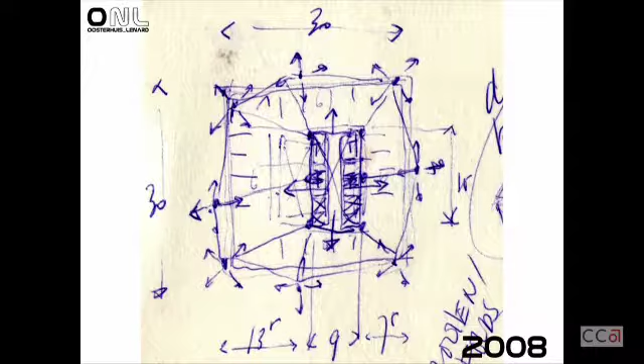The way I would like to approach it is to have one system where I can tweak all the points, all the vertexes—just like it's also designed for a tower, exactly similar, but with a completely different attitude. Then I write a program where I can tweak all these points. Probably because this came too close to this, but I'm not sure—I won't do that again. So I can tweak those points for all of these floors, and while tweaking, this is my target value.

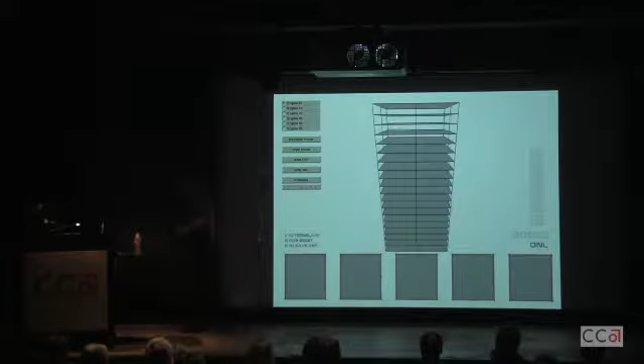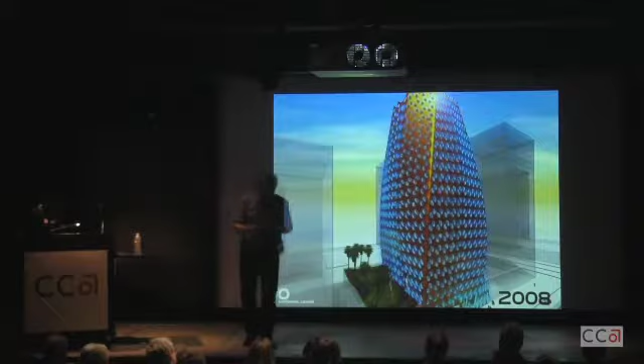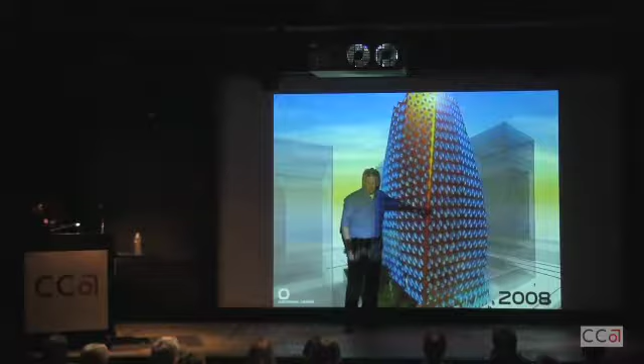The interesting thing here is that in the process, things change. For example, one week before we had to submit for the building permit, there was an extra elevator planned inside. So we had to pump up the whole volume again to reach the same GFA, because the elevator is not included in the GFA. We had to pump them and tweak all these curves again, and we did that whole work within one week. We redesigned the whole design because it was a parametric system, because it was consistent, and all the parts were related to each other—we could do that.

So this is an important quality or potential of parametric design: that you can have all building components related to each other in every stage of the project, from sketch.

It's actually a rough technique that does not allow these sketches to be directly translated into buildings. That's what we try to do, and it's very much in the way we work together—we want an intuitive approach, directly related to how things are made, with the precision of the new technology.

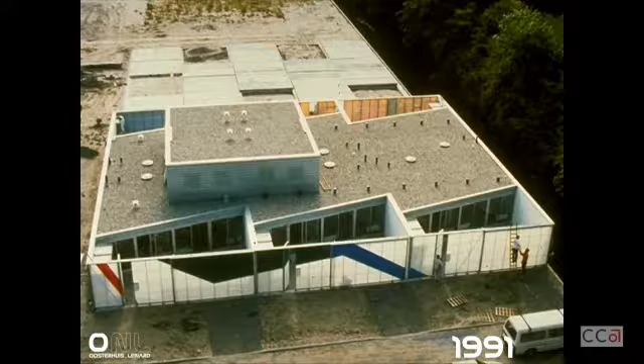And of course it does function—you could slide doors open and put your car in there. So it was a very pleasant way of living, actually, in this patio housing in the middle of the city.

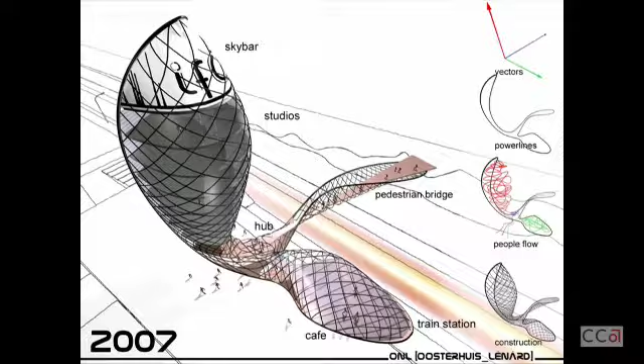So this is another example of those power lines, as we call them—these intuitive gestures. They can constitute a building, eventually. It's one gesture, and we already have in mind that it's becoming a tower, and that's becoming a bridge, and that's becoming a canopy-like structure for a train station and a restaurant. We already have that in mind, and we make the sketches, and then these sketches become exactly the basis, very precise, for the later building.

Another example of an intuitive sketch directly translated into a building. And actually the interesting thing is you can just do this. There's nothing which stands in the way—you can just do it.

Of course, we have to find a system for how to build this, how to build components and how to connect components to each other. Here's another system embedded in it—you have to think of that component and the others, how do they connect to each other.

For today's architecture, I think it's not so much the isolated things themselves, but how they connect to each other. I think that is some of the basic things we are worried about these days.

The essence of how we operate is very much like procedural work, procedural painting. So generating sketches is already a procedural act. The way Ilona did it, for example, was making hundreds of sketches in 1 or 2 seconds, very fast. So what Jackson Pollock was doing is also very procedural—it's a method, it's very methodology. And that is very interesting because it is so close to scripting.

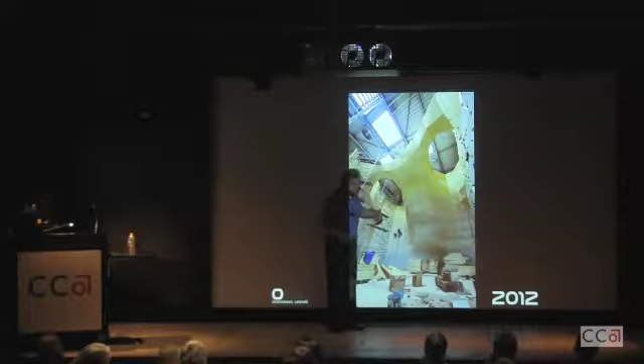And it's high resolution, so that's the other thing. So this is, for example, a sort of in-between step we are taking with our office. It's a climbing wall system. It's very systemic. It's open to information from power lines from our side. It's open for interventions by climbers themselves. It's an open design system. It has the building components. It has a higher resolution than the living unit. And you can build anything with that. So that's actually the translation into practice of that attitude.

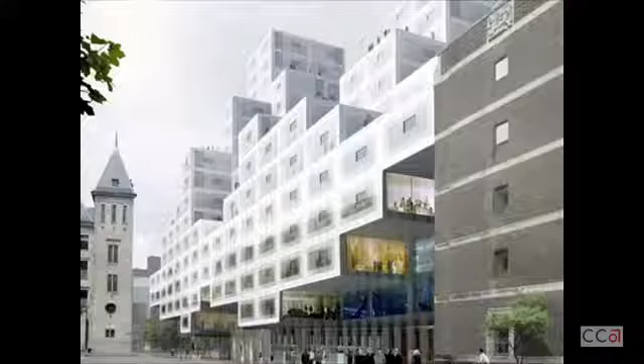So then we talk about resolution. This is an OMA project. It's again that low resolution attitude, which is very similar to what happened in the 60s and what happened in Montreal also in the 60s. As opposed, just to clarify positions, different positions you can take in architecture - you can take either that position or you can take another position.

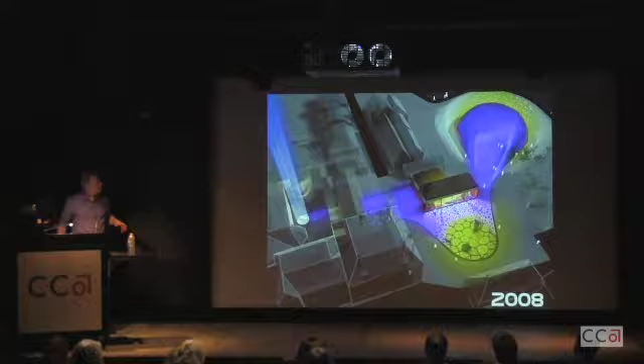This is one of our designs where we have a very high resolution actually in a roof. It's an underground project, and there it becomes a landscaping exhibition hall. And it's all based on that building component that can also become larger, and then it can shrink and expand. It's a complete parametric system, and it's completely moldable. That is higher resolution, as high as we think now it's feasible. You can also go higher in resolution, in fashion, for example, and you see a lot of developments actually in architecture that go even higher and higher in resolution.

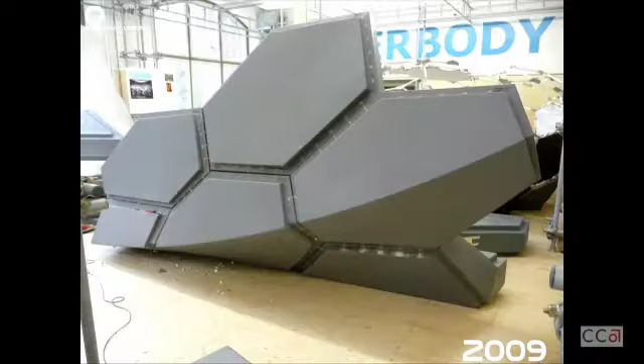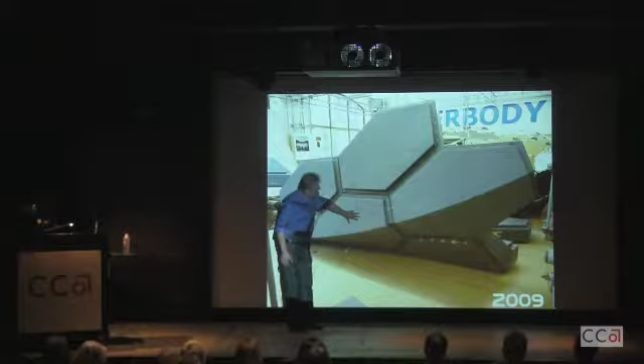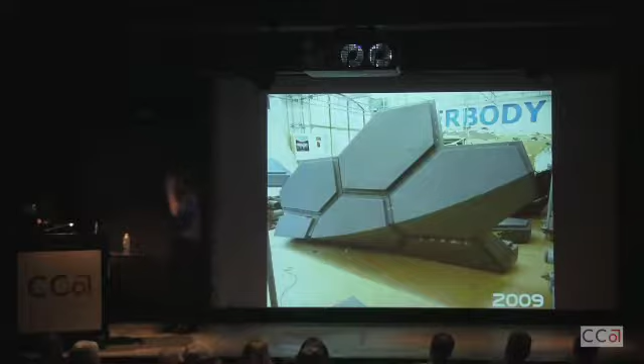But it's higher resolution. So this is a kind of resolution we are working with, with our Hyperbody group at TU Delft. This is a building block. It's fully parametric. It can take any shape, but it's always related to its neighbor. It's almost like, and that's the comparison I often make, it's like this is a bird, and that's another bird, and that's another bird, and together they work in a flock. And they always are measuring the neighbor. This reference point is always questioning that reference point, which is the point of gravity. Where are you? What is your distance?

And that is the kind of thinking we are completely immersed in these days. And I think that is a very good way forward for a next generation building to think like that. We have to change the very building blocks of architecture. That's basically the message. So don't think bricks, don't think prefabricated housing units, but think of building blocks that are fully parametric, fully controllable, both by your top-down design acts, radical or not, or by systemic emergence from the system itself.

I also use an approach where you have a series of points that relate to one another. But when the purpose is just to manifest a form that you sketched out, that's where I start to lose you. I can see a valuable purpose like cutting down on material waste or creating a unique lighting situation for a unique program. But when you stop looking at function and just make a parametric system to realize an intuitive sketch, that's where I start to lose you.

Well, there's more to it. So stay with me, you will find out. There's more to it.

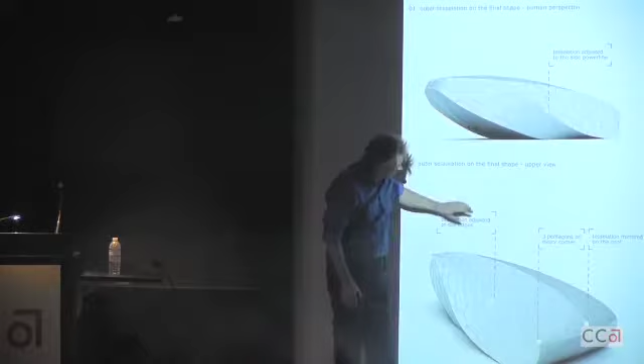The point I want to make is that we have these swarming elements, but some elements may be a window, or a ventilation unit. Some, not indicated here but you have to imagine it, can be a heat or cooling unit. So we can assign functions to each of those components, and all those functions together form a climate, a space, a building that functions according to a pre-requested program.

But whatever happens, the relations must always be kept intact. Don't lose the connection. That's the connectivity point I want to make. It's always about connectivity, both in its meaning, in its construction, and in its functioning, its operational life.

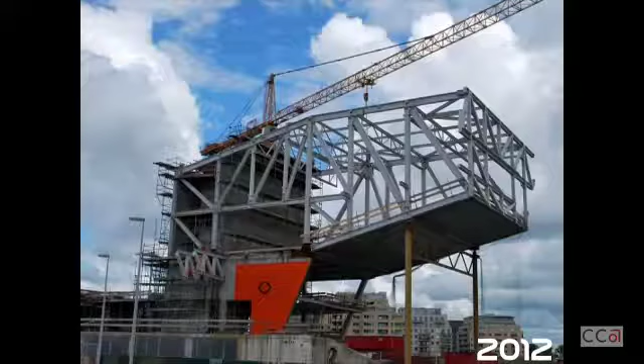If you look at this, it's a great building, absolutely great space in here. But if you then look at the structure, it looks as if I'm criticizing everyone. That's not the point. It's that I'm pointing out that you can have a different attitude, you can choose your attitude, what you want to do. If you see this structure, it's a mess.

I simply have to say, it's simply a mess. It can be anything. You see all sorts of hybrids, even in the steel itself, and then strange mixtures with the concrete. And somehow this happens all the time.

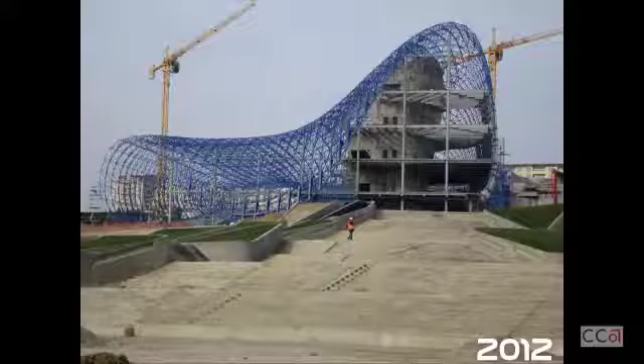It happens to Zaha Hadid. It happens all the time. You see this fashion around it, and you see this very traditional structure inside. And even, which is weird, this structure, which is absolutely able to bear its own load, is supported by these. It's not right. I'm absolutely sure she doesn't really want this, but this happens if you don't integrate the way you structure and construct it into your design process, if you don't relate it in a way that it cannot be taken apart.

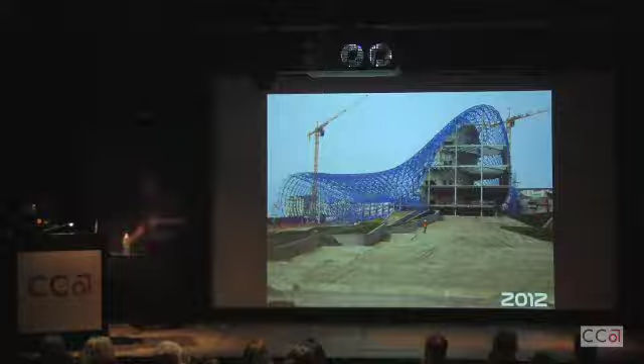Well, it's clear that it's like a drapery, like fashion, and it's very difficult if you start like this—that's another way it ends up for the person in the end. If you have this intuitive design approach, which Zaha Hadid obviously also has, but don't connect it to your design system, how it's built up, Patrick's part so to say, if it's too loosely connected, you lose that connection between the skin and the structure that supports it.

Okay, let's see how we try to do it. So all we do is try to do what we think is right. And that's also typical Dutch, by the way. That's our... but okay, I cannot change that. So, it was orange too, but it tastes like lemon in this case.

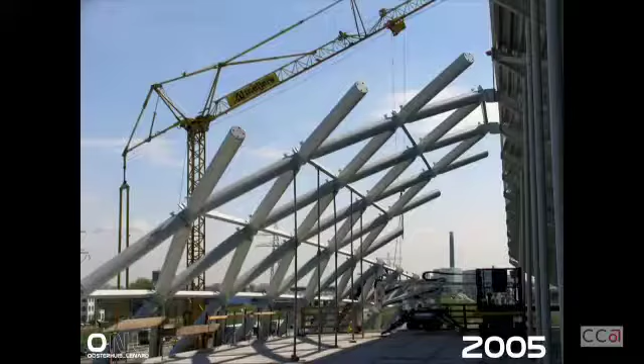This is the cockpit structure. This structure is completely in sync with the skin. It's developed together, and if something had to change in the skin, some of the dimensions, for example glass dimensions, you have to cut it in a certain way, and you cannot extend certain sizes—you have to change the structure as well. So everything is related to each other.

And it's a building kit. It's IKEA, basically it's IKEA. You have some of these components, they're all different, so in that sense it's not IKEA at all. It's parametric IKEA. So you have all these components, and you bolt them together, and surprise, surprise, you get your building. It's that simple.

You can do it with these one-person offices, they can do it, because it's that simple. If you build this relation properly, then you can bypass contractors. This building was not built by a contractor, it was built by a steel manufacturer. You can have a direct link between you and your design system and the one who makes it.

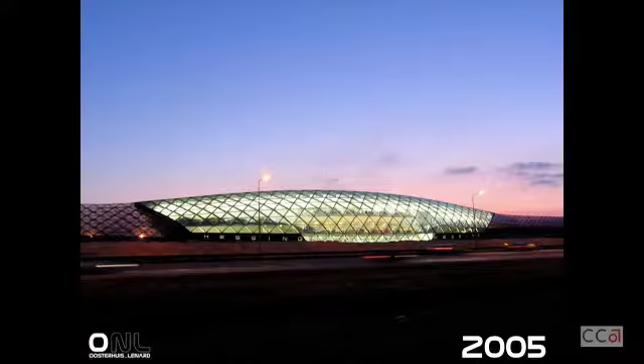There's a lot to say about this, but it's also used for movies. It's a very nice space inside. It is a showroom for expensive cars, like Rolls-Royce and Bentleys, Lamborghinis, but now it's taken over by another guy, and he sells Lexus—I'm not sure that's the proper one.

Okay, let's have a look at another aspect now. We have been talking about these building components, the relevance of that, so I have more about that. But first of all, and that was the first chapter in the book, tag that body.

So these are identities, all these points, it's a universe of the internet. All these points are tagged because your computer has an IP address, has a unique number. So what is now the case, is that all of these components your building is constituted of, they need this unique number throughout the whole process.

Chapters of a book have this unique number and unique relations to others. This is maybe more interesting, and it refers to that Hyperbody project I showed you of this building component.

So think of all these players. You have these, they are similar, but then you have the other type, the bigger ones. And they all have their functions, but together they form a relationship. Together they form interacting swarms of different components. That's exactly what they do. And then you have this type, and then you have the people that walk.

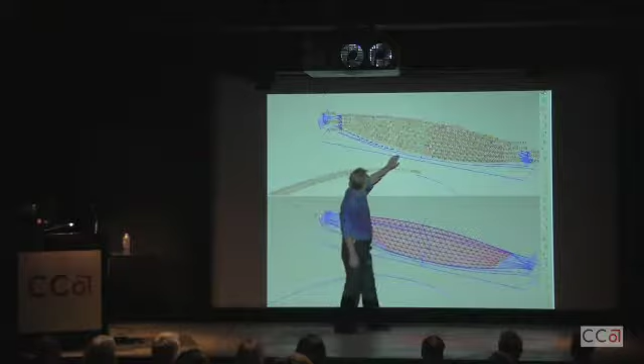We have all these points actually driven by a mother curve, a law curve, so to say. So there is some sort of law and order here, but it's radical, it's irrational, it's driven by that. So we have all these numbers, all these points, related in this network. And, oh, I don't have the next image here. Okay, I have to change the story then.

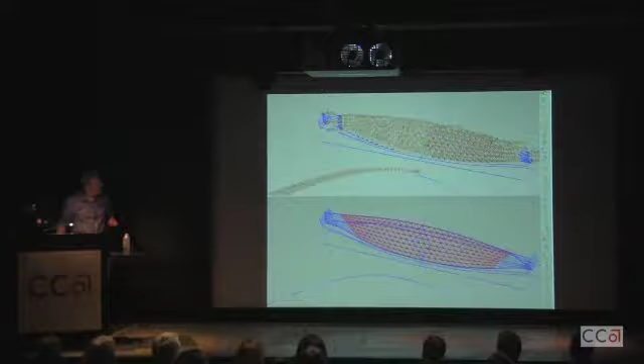Into this project... yeah, I'm so tired of these linear presentations because I want to jump, and I cannot jump in this PowerPoint presentation.

Okay, this is all the data you need to build it, driven by what I already said. You're driven by the angles from the climbers and the curves from the designers. But this is about the scripting part.

I wanted to mention, I think the difference between the chaos and the order: Bombay's population is half of the state of California. So two Bombays is the entire state of California. Would it work if we use the logic of our cities versus that chaos theory? Yes, the answer is yes.

You asked for it. Well, basically, what I think we have to learn is to deal with masses of data. We have to find a way. There are many ways. You have, for example, the other Dutch guy, Winy Maas, Datascapes, who works with massive amounts of data. But the other thing is, what does this piece of data represent? And then I want to go in a higher resolution. Well, the essence is we have to learn to work with massive amounts of data.

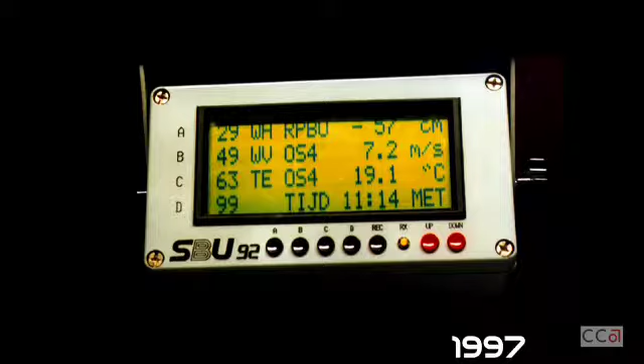Well, more data coming in from sensors, informing the light environment in the Water Pavilion, always changing according to that emotive vector formula, which is, again, completely irrational.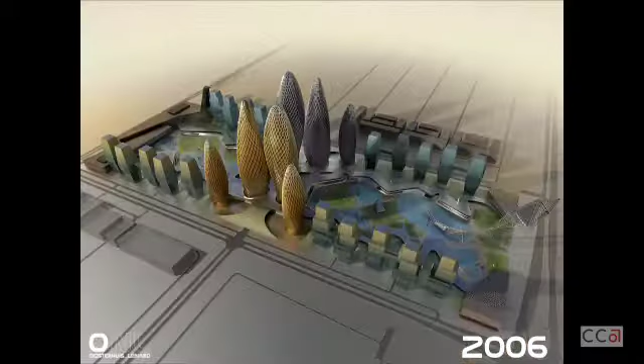Scripting, like a sort of game for urban design, where we can play with all sorts of parameters connected to those objects, and objects are connected to other objects. There are attractors that are actually aligning objects, there are repellers, etc. So everything is related in a parametric system, and in the end you can have a direct translation into architecture from that parametric system.

So now we come to that component level, which I keep emphasizing. This is an example - and that's another name I have difficulty remembering... that's her, yeah, that's her. I think these are quite repetitive, these components, but what I like is the airiness and the lightness of it, and there's a relation with the structure, by the way. That structure is not exactly correct in its execution, but I think it's a big step forward.

Another way of thinking of components is, of course, this - what's the exact name of it - quadcopter. The quadcopter actually picking up the stones and placing them one by one. Well, you all know this example.

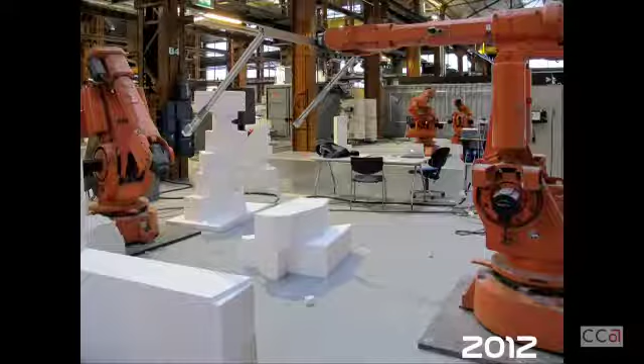So also in the assembly phase, this gives the promise that it's important to have an identity of each component, and an identity of the relation with the neighbor, the exact position of it. But of course, I would never choose bricks to work with. I would make my components as unique components and then have the quadcopter placing these components.

So what we do here in Hyperbody, my research group, we have 4 giant robots. We have this as basic material, and we use something like this, which is a hot wire that can actually move in space and describe all sorts of complex forms, but still linear because it's a wire. We also have that with a diamond cutter for harder materials. And then we can make things like this - a building component which in itself is complex, and which combines with other components to form the structure.

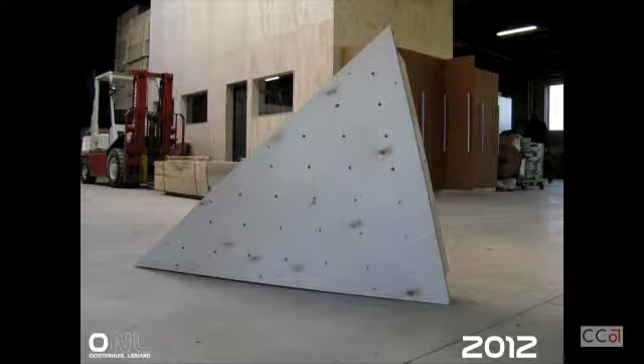Well, back then, to a simpler component - explaining how everything and all the connectivity to other components is actually already embedded in one component.

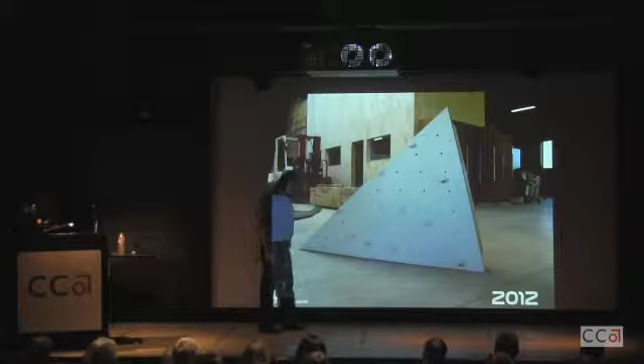Okay, so all the shapes are different on that climbing wall. It has one central point from where all these other points, necessary for applying these climbing grips, are aligned with it. And if the triangle is different, the pattern is also different. Then we go to the other side, the back side - everything is 3D milled.

Oh, the side of this - you have to realize that the side of this triangle has a twist, because the shape is doubly curved. Everyone who has worked with doubly curved surfaces knows this: if you have a weight normal on the surface here, and the next point you have it here, there's always a twist between those two weight normals.

So how do you do that if you want to have a smooth surface? Then you need to go from here to here with the milling machine, following that twist. This doesn't need to do that, but it needs to be adjusted in its base, such that it can be connected by bolts to the next one. So all the connectivity is in a parametric way, in structure and skin, connected.

No, I don't have that image. So behind the scenes you have all these connectors. You connect here, and the interesting thing is that we don't have structure in the node. We have it here, and then it transfers the forces through the skin to the next connector, etc. So the whole thing is very much skin and structure working structurally together.

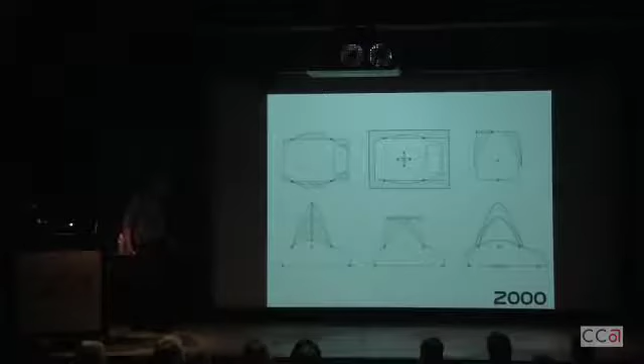So that's where we come closer to making products, housing products, house as a product, where you can actually tweak all the vertexes yourself. This is a project that has not been built yet, where users can tweak all the curves to adjust their own shape. That's done through a website. We already built that in 2000. So you can tweak all the curves — you see the feedback here, the curves, roof, other curves, sizes, pump it up.

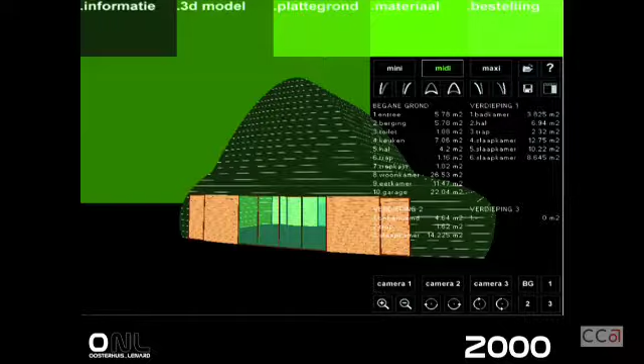And the interesting thing is it's still our design, still our signature, but it's also open to users. That's also their signature — so we become co-designers. More examples of that.

Let's quickly go to this. This is the basis for that polynuclear landscape design I showed you before. That's the plot, and the plot has that potential of bottom-up grow emergence. Well, it's very obvious for you as Americans that the plot has that potential. I think it's brilliant. Grid cities are brilliant.

So that landscape has the potential to grow from there, but maybe there's one step more we could do, and that is in another way play with an attractor game we wrote in 1997: play with parameters, the sizes of what you build in this landscape, and the cubic meters of water you want to build. So register everything exactly, play with the number of trees, and make these public spaces, these combinations, but all based on an exact calculation of how much you have.

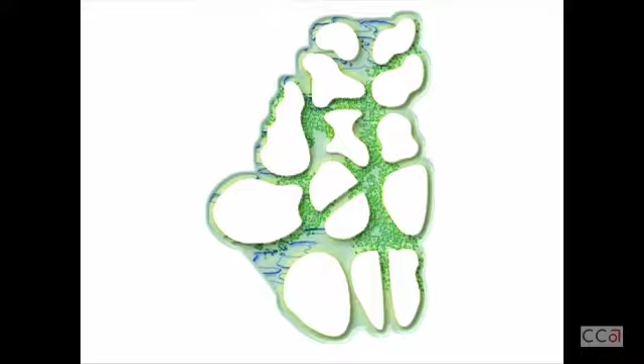So this approach could be combined with gridded cities. For these areas, playing that design game, you know exactly how big these domains for living are. And here it was interesting to have ecological corridors in the housing areas, with this as an end result of an urban design for 1,500 houses.

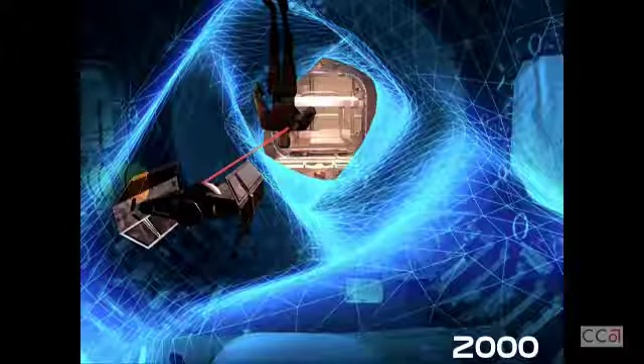The other aspect is when you identify all these individual components, all these reference points and the connectors between them, you can go lower and lower, or higher and higher in resolution. You can also actuate them. If you can identify them, you can also tell this point to move if the connector between this point and the other point is an actuator and not a static one.

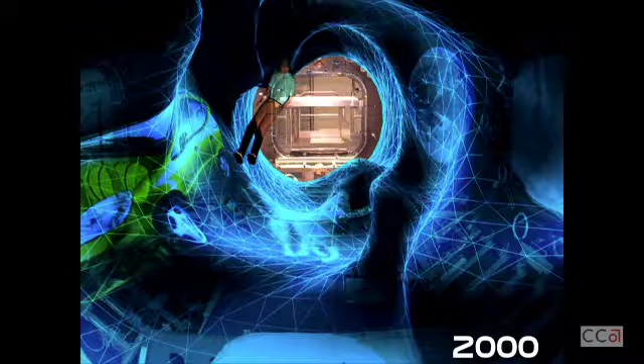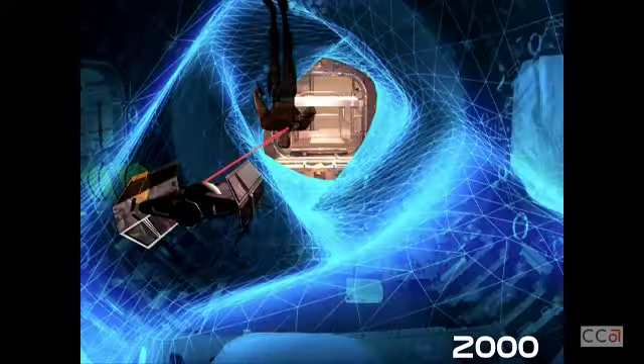So that was the basis for this project. It was the design for the interior of a space station, to have one skin that is fully programmable, and you can program this space to be different things: a working environment, for example, where you have sort of a table, or this other environment for playfulness. So you can have these different modes, basically.

You can have these different environments that actually accommodate different functions. So this is another way of telling that it makes sense to identify and think at the component level and have the emergent modalities from there. It does make sense. And also this environment is completely informed by what you want to do, so it can be informed by functions, by activities.

Project we did with Philips, it's called iLight, intelligent light. These are tiles that are intelligent. They are connected to the neighbor by magnets, so you can take them apart and place this tile elsewhere. It has a circuit board inside with small intelligence, and it looks at its neighbor and asks what is your state, your color state in this case, and then negotiates with the neighbor to become similar, to adapt to the other state. So you can see things happening here. It works. This tile exists. It was an experimental phase, but it's not on the market.

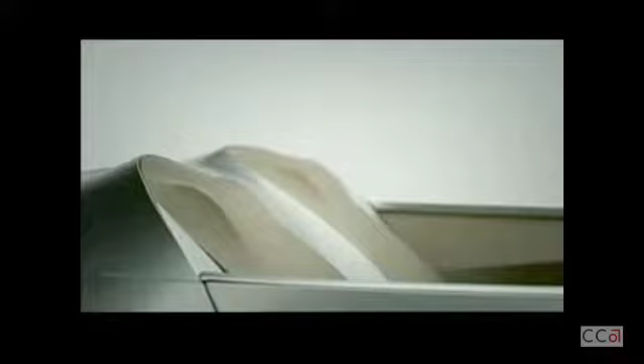Just have a look what is happening here. The feature lines, the other irrationality in car design, aren't exactly for streamline, but for building the character of a car. These feature lines can move, so as the owner of the car, you can tweak these lines yourself, you can customize the feature lines of your car. I think it's a great idea. Aesthetically, this prototype has been the basis for the whole BMW 5 and later 3 series.

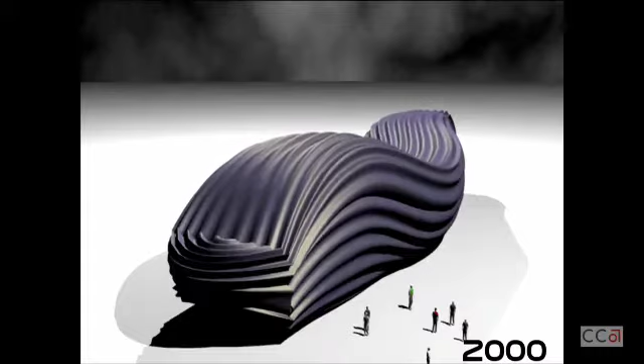What we fancied in almost the same period is, suppose you have this building, it's big, you can see how big it is. It has this three-dimensional skin connected to its structure, composed of actuators, big electronic pistons. You need those pistons to know exactly where they are, so you can give feedback to the system. If you compose your structure of these pistons, it can expand and shrink, and you can adjust your building to different functions. This is another idea that is actually quite valid. It sounds a bit far-fetched at first, but you will see how much this has crept into the minds of many younger artists and designers - this adaptivity of structures that you can adjust to different circumstances.

Maybe it doesn't look like this, maybe it's much more distributed, like components, like this project we did with Festo - certain components of buildings that behave differently and can respond to the people using the space, or passengers using the space. The walls, this dynamic wall, could then respond to you as a passenger. You pass by here, in the base there are sensors placed. These sensors sense someone approaching, and then they respond to that. The way they respond, of course, is completely up to the designer, because programming, writing lines of code, is designing - there's no difference.

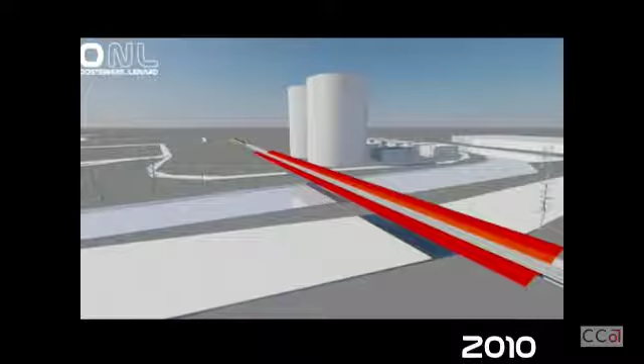Actually, adaptivity was our main issue. We should not resist and we should not fight, but actually adapt and include. Inclusion was the main issue — we should include different ways of lifestyle instead of resisting and fighting. And of course there was always one moment where you think back, and this volume could actually become the two phantom legs of the World Trade Center. Sorry to be a little bit shocking here, but the basis of it is to adapt to changing circumstances.

An acoustic barrier that adapts to the train passing by.

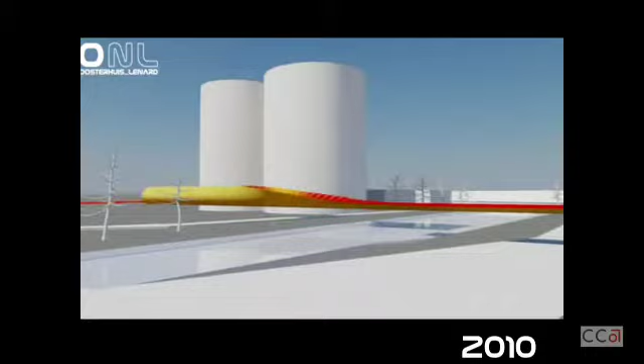The motto for this project is very clear. Now you see it in the relaxed situation — you don't need an acoustic barrier if there's no noise. That's basically the message. So why should we build all those ugly fences around the highways to block the sound if there's not always sound? Well, for a highway maybe it's almost continuous, but for the train it's absolutely not.

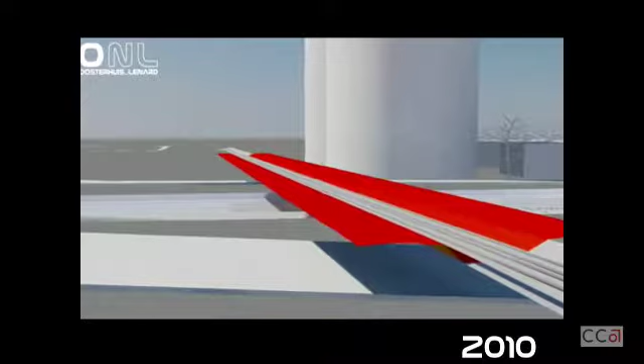So once in a while there's a train, and then this acoustic barrier wraps the train to block the sound and then relaxes again, and can have a life of its own as an art project. It can relax and have some movements, even if there's no reason.

Can I ask about the functionality of the acoustic barrier? Because my understanding is the requirement for sound buffering is mass. Yes. And the image that you have is fluid, and it seems thin.

Do you mean this image that I just showed? That has mass as well. You don't need much, by the way, as mass. There may be a new material that we don't even have yet that will provide acoustic insulation that doesn't need to be stiff and heavy and weighty. No, it doesn't have to be.

The requirement for our acoustic barrier was you need 10 kilos per square meter. Well, that's this much sand, for example, in a flexible bag — that would do it already, so it's not that much. I didn't invent the rules, but that's the rules that were given to us, and that would suit our situation in Holland.

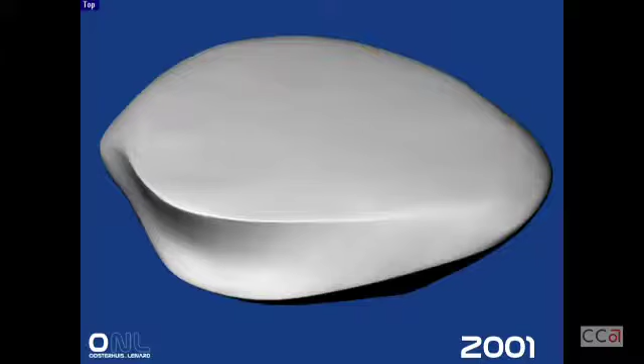A smaller one, the Web of North Holland. Structure, the play of light on masses - what was exactly the quote of Corbusier? Masses, play of light on masses. Also from the inside, like hot lava, it's coming from the inside to the outside. This is the design, which is the power line, the feature line on the volume, very much comparable to feature lines from cars.

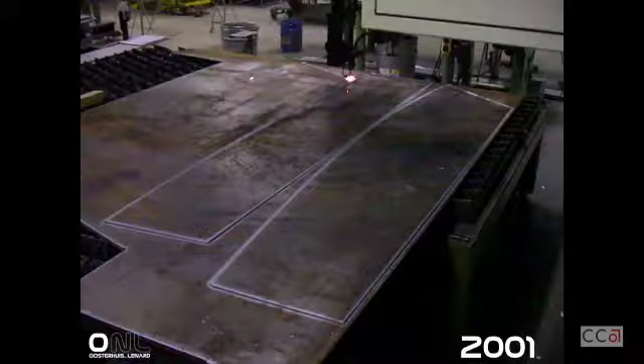Translated into structure, CNC produced, just to give you a very quick overview of how things are done. It's not that advanced - this is a machine that already existed 15 years before we even discovered that it existed. So these big periods of time really have to pass before we get to know things.

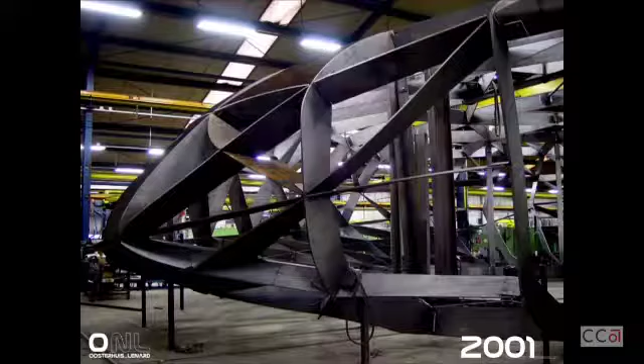Then each component is unique, and because it's double curved, many components are twisted. Let me see, where can I show that? Strange, well, okay, you can see it in this one, for example. But actually most of them are twisted - oh, not these ones, these are not twisted - to accommodate the curvature.

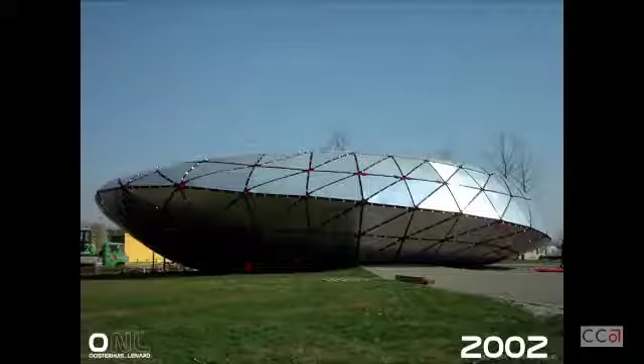Architecture - no, sorry, art, architecture. Yeah, because now it has a function, it has a door, so there must be something in it, so it must be functional, must be architecture. Well, that's the whole difference between art and architecture.

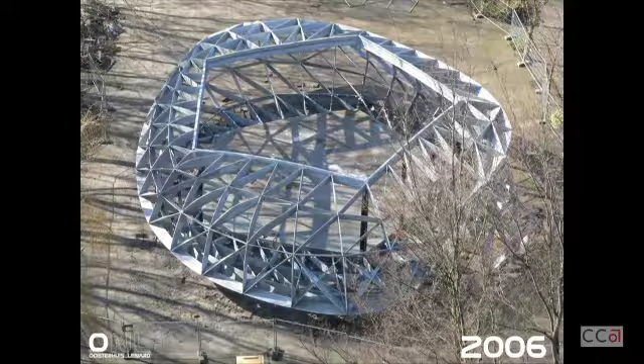Functional use, second use, the structure alone, new detail, in front of the faculty - in front of the burned faculty. This was a tragic moment in 2008. And now that building is completely gone and we are in a renovated old building. Maybe some of you know that, and actually it's a perfect place to work. This was not so good.

Yes, I go now to the - let me see, yeah, I think really these sort of facts is good to see. Just go quickly through it.

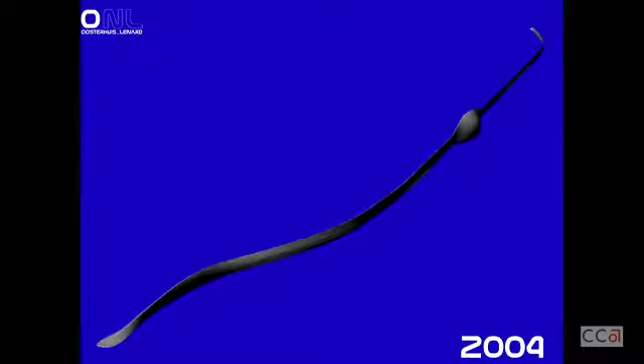This is the acoustic barrier in the cockpit, point cloud, scripting - not drawing but generating. Not drawing, generating the 3D model, generating the exact panels to cut for the glass, generating the exact holes for where the bolts have to come.

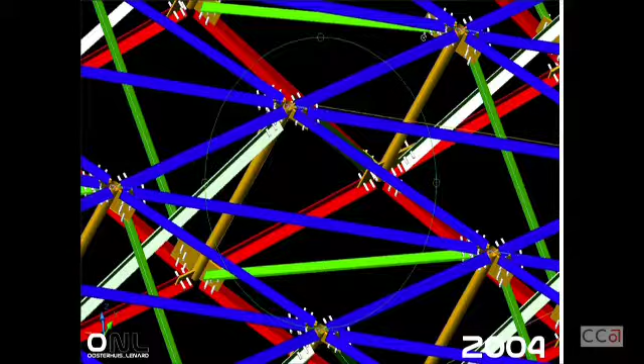This is actually a visualization of the structural program of the steel manufacturer. Making it, it's as simple as this - it's just a normal workshop, but it reads data.

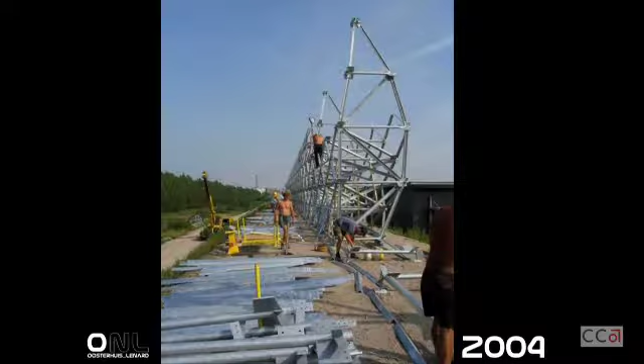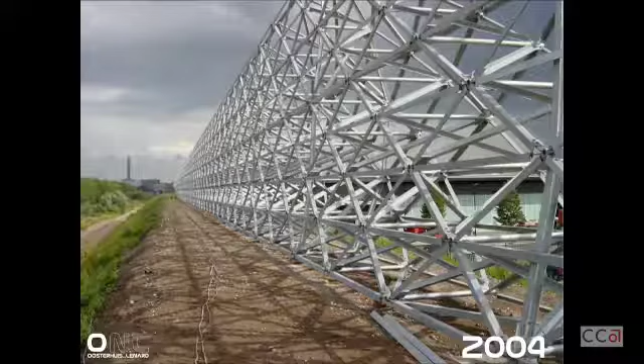Making a prototype, always necessary. Identify all the components - each component has a unique number. Make prefabricated packages of components, bring them to the building site and bolt them together by heavily underpaid workers, I have to say. That is mostly the case, because they don't need to know anything, they only need to know a number, and then putting them all together, and then the dynamic of the shape is formed, and then it forms the shape.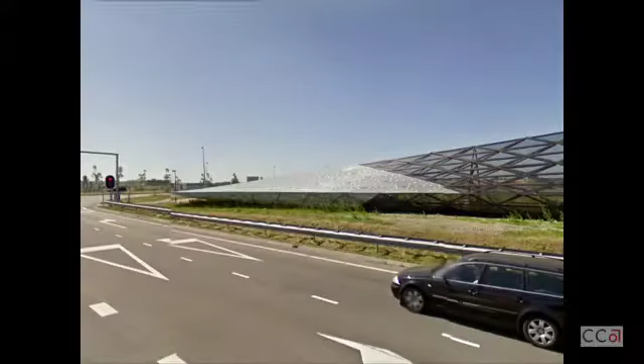We didn't want to have the acoustic barrier end abrupt, so that's why we have this feature line, the fault line, and then becoming actually this line that goes all around, and then it continues on the other side. So it has two equally looking good sides to it, not a front side and a back side. The client, happy with the model, physical model, the concept, the node - this is one of the 300 different nodes constituting the building.

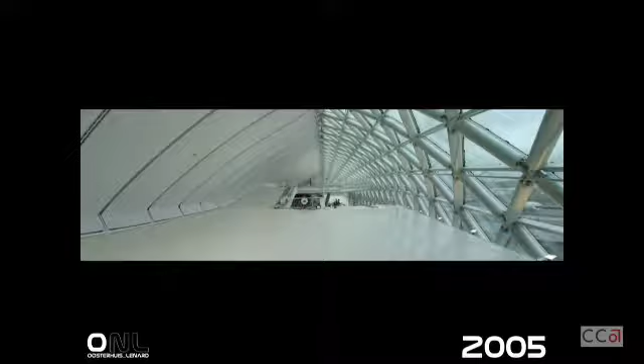Okay, a quick word on evolution. I go very quick now. Separate components, more and more embedded in the body, more and more integrated in the grille, more and more rounding the corner, more and more becoming part of the whole.

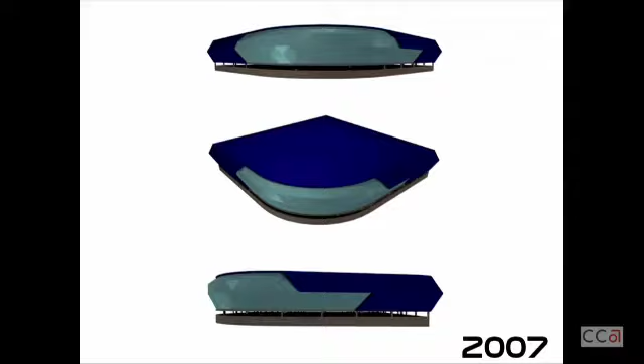All sort of lines continuing from here, in the headlight, and then continuing in something that is completely alien to it, but still communicating. And I think that is an enormous progress in body design, and we can learn a lot from car design in that sense. Because usually it's not done in architecture, and I think this is the big future for it. So some of our attempts is a BMW showroom.

That is actually one of the big progresses we have seen in car design as well as in architectural design. So no more side view, no more floor plans. If I would teach here, I would actually forbid floor plans, forbid side views, forbid sections, etc., and almost forbid drawings.

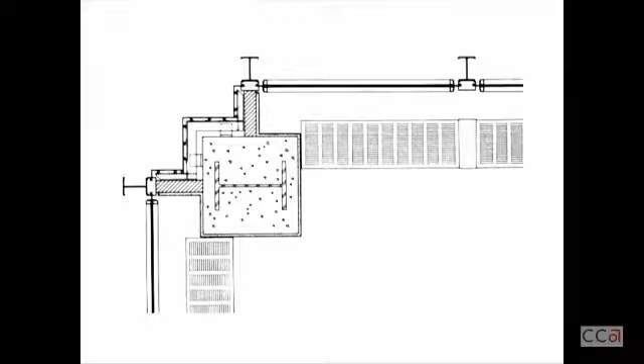So this is the Mies corner, and the radicalized corner - let me see where I can find it quickly. Oh, it's in the end. Well, it starts here. The radicalized corner. So this is the Liwa Tower in Abu Dhabi.

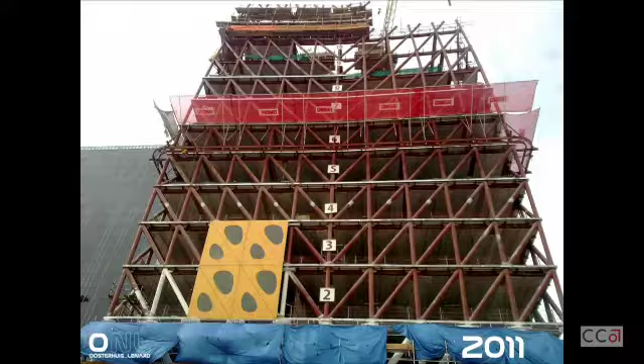We have been building so all these building components are unique in size and dimensions, but when they fit together, it's very robust, as you can see. When they fit together, they form the whole, and they are in sync with the structure of the skin. So you see a very high definition of the structure. It's very dense. It's also very strong.

It doesn't use more kilo steel, by the way, but it's denser in its structure because it has to sync with the skin, and usually the skin is smaller plates of raw material where you have to cut the aluminum from, and the glass, etc. So that's where they come together, and then they work together.

But now this corner problem, which is no longer a problem - reference point inside of structure refers to a reference point on the exterior of the skin. That's one system, and then this is the logic. Then the reference line here somewhere in the middle - that reference line travels. Where's the corner? Travels towards the corner.

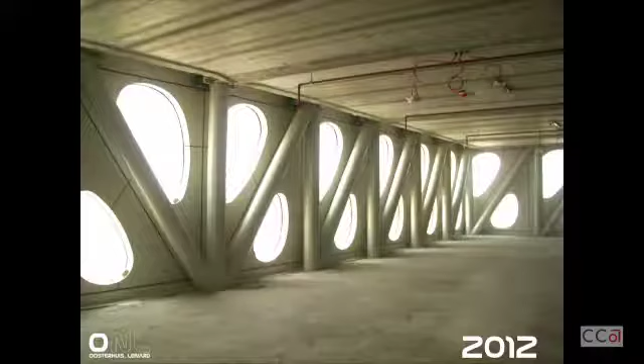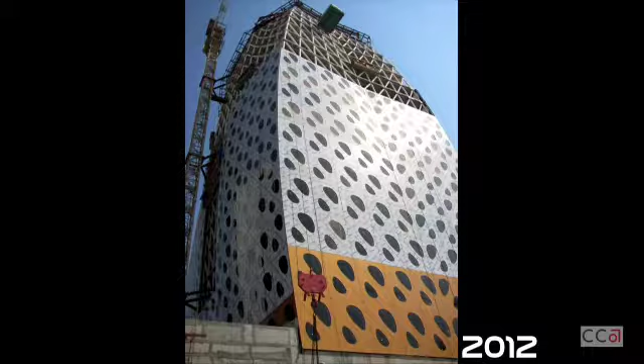And you can see here clearly, this reference line is no longer aligned with this, and it becomes, because it sort of travels to that corner, step by step, meaning that it's not a fixed relationship but a dynamic relationship between those two reference points. And only therefore can we have this corner, which is exactly the same detail as this line, and the fault lines somewhere in the middle.

So that is the sort of radicalizing of Mies van der Rohe - or in other words, Mies is too much, which I used to say. Both because I like him very much, I very much respect Mies van der Rohe's architecture, I think it's super, but still he uses a lot of additional details which are not necessary if you have a parametric system that can actually cater for all these variances, all these instances. And that's the inclusive approach.

So this approach includes the other approach. It also includes rectangular architecture, in a different way than traditional architecture excludes this. So that's the difference - this includes, the other excludes.

And it is called Liwa Tower because the colors look very much like the Liwa Desert, which is south of Abu Dhabi - it's part of the big, empty quarter.

I would put this as an image behind my desk instead of that image of Niemeyer.

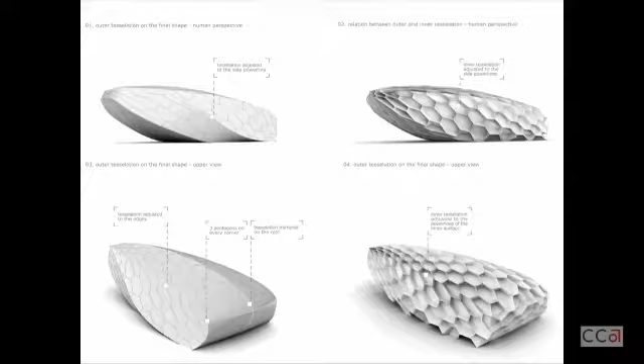So now we are coming to the closing section of the lecture, next generation building. That is building from component level.

Imposing all sorts of power lines you want to have on that system. They're working with the robots, the components, working with the intelligence.

They work as members of a swarm. So this brain communicates with this one. If it radiates some data, this one is informed and then brings the data to this one, to this one. So it sort of has a viral effect from there.

Also, this system can be informed top-down, to start from here and then spread. So it's a combination of working together, a combination of bottom-up and top-down working together.

But it only works if this identified component is intelligent. And then we can actuate such a structure. Then it can actually act by itself, and it can also be acted upon.

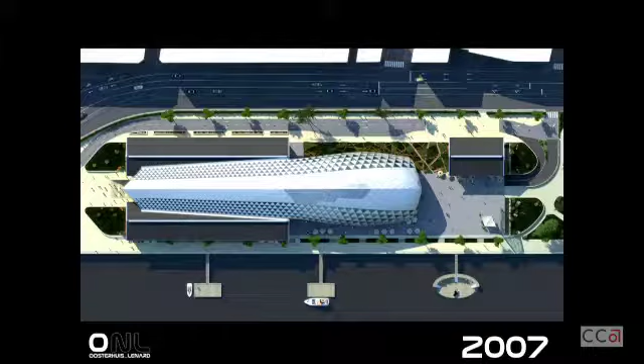We have 2 warehouses, and we have a lost piece of a warehouse there. And we have a pitched roof, like this pitched roof, and then it transforms and rises up, and from the top, the pinnacle of the pitched roof, it leaves and touches the ground and forms a body, forms a volume.

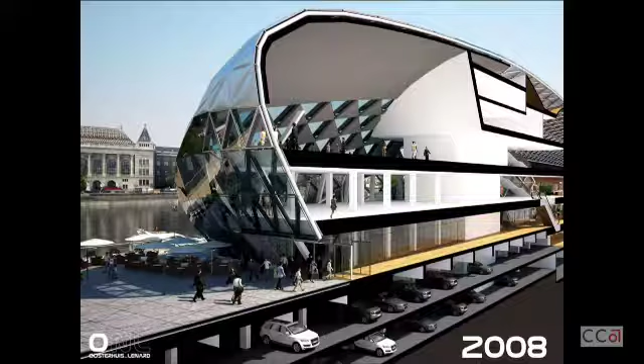So here, behind it, this roof goes up, and exactly at the top it leaves, and exactly there it touches the ground again. So these are the power lines we enforced on the system to form a big event space inside there, and escalators leading up to that event space.

This is then the entrance from the city side. Here you have, by the way, the Faculty of Architecture, which is very interesting because you have some of these old-fashioned traditional teachers here, still in white coats. Remember that? Old days, white coats, big paper tables, and they're looking at this.

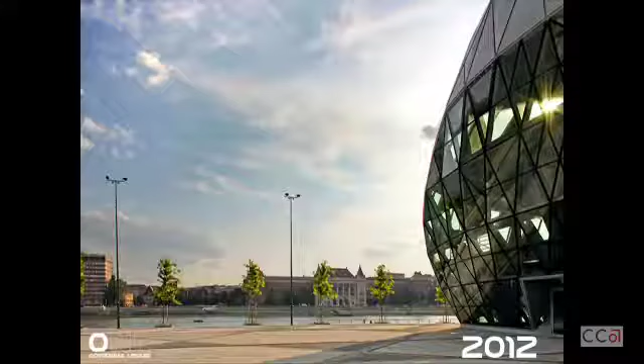Very interesting, it's already used as a venue for marriages. Like here they go to the Japanese garden to have their pictures that we saw yesterday. It's interesting that they choose these kinds of situations to make the wedding picture. So that is the traditional part where we have the three roofs, and then it extends into that body part.

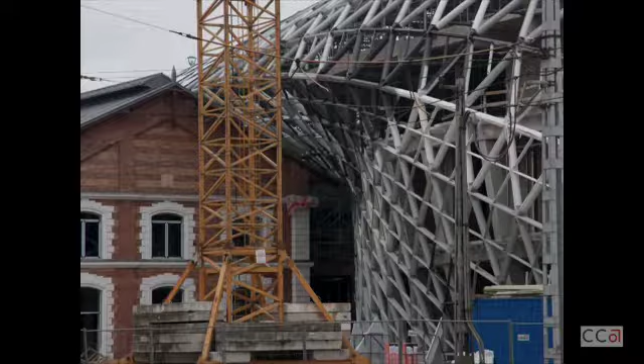And here you can see how dramatically the structure actually comes from there and then almost falls down, and here is a dramatic twist in it. But it also forms a very functional canopy to have a dry side entrance.

So there's always one more reason to do something. And maybe that's, if I would have some real message, then I think that's the definition of sustainability for me: always have more than one reason to do something.

So if I build an acoustic barrier, I build a building into it. So then I have two reasons: one is acoustics, the other is I have a building. So if there's more than one reason to do something, it's the most sustainable act you can do.

And I call that Next Generation Building. It will be out end of this year, and I will send invitations around to send in papers for that one. Okay, I would like to finish the lecture here. Thank you for your endurance.